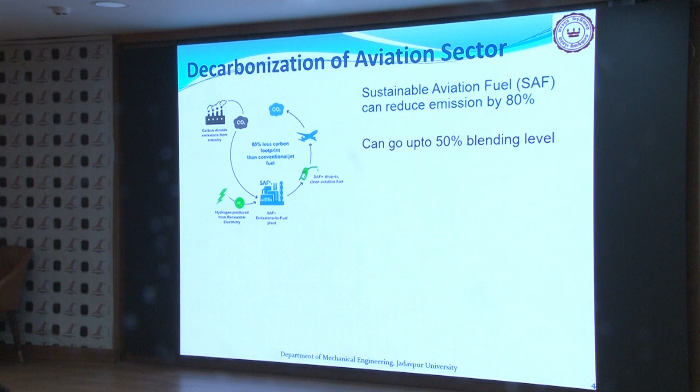with synthetic fuels. But there is good news: in 2021, United Airlines had one experiment, and they demonstrated that 100% SAF could be used in the engine. But okay, let us see how long it takes to go for that for commercial purposes. Actually, the problem now is cost.

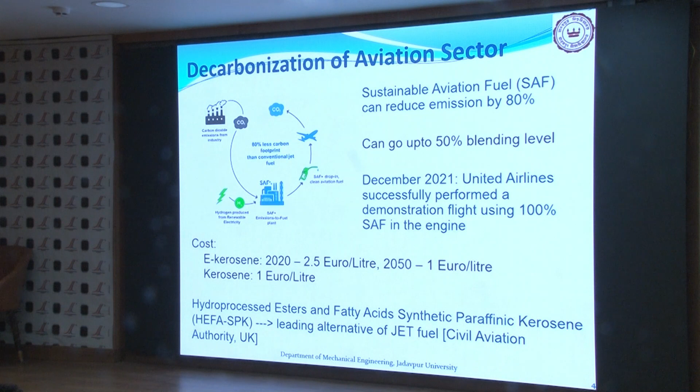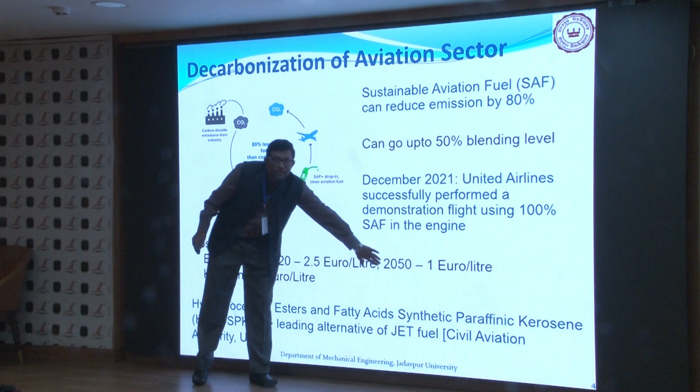As Dr. Sharma pointed out in the very first plenary lecture, the cost at present is somewhere here. It is 2.5 euro per liter, whereas our regular kerosene we can find at, say, of the order of 1 euro per liter. But the situation is good in future; in 2050 the cost will come down. So we can go ahead in that direction.

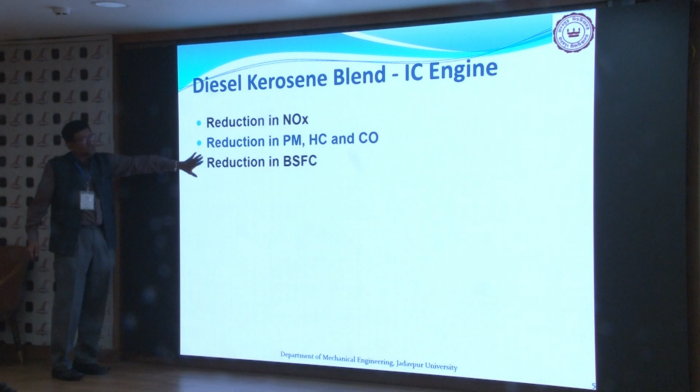Now we can use diesel-kerosene blends in IC engines also. The main reasons are basically these two: we are reducing the emission, but we are compromising some amount of BSFC. So the finding is, if you blend up to say 7 to 14% kerosene, there is no significant loss of BSFC.

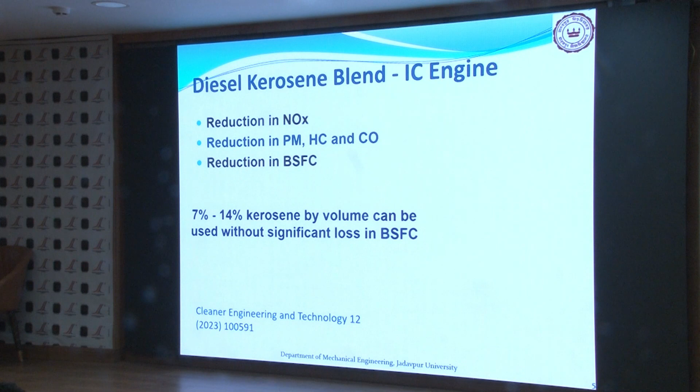So as these three are pretty similar, we can think about the spray characteristics of e-kerosene in light of our earlier kerosene research. So the question is, are their sprays similar? If these three things are similar, we can start with at least a preliminary idea that our spray characteristics will be pretty similar. Maybe not exactly, but almost similar.

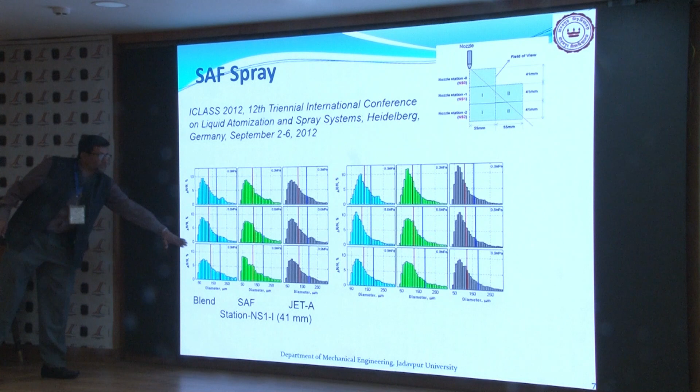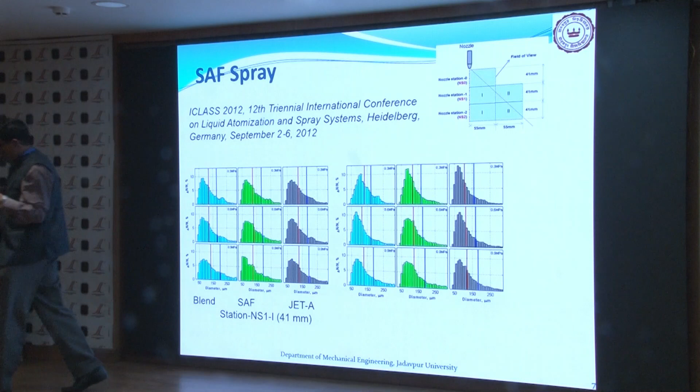So there was one experiment with a nozzle. If you look at the spray characteristics of three fuels, one is SAF, one is pure jet fuel, and one is the blend, it is very hard to differentiate between them because they are pretty similar. And the mean and Sauter mean values are also similar. These are at three different pressures and at two different locations. So we can say that, covering the whole spray angle, we are getting pretty similar features.

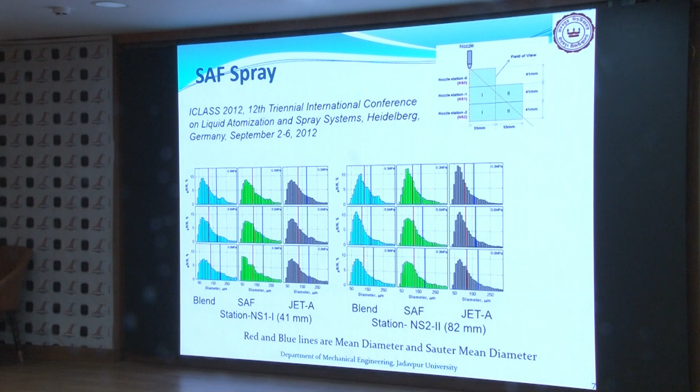So these are the extract from the earlier thing, so there is no need to explain it more.

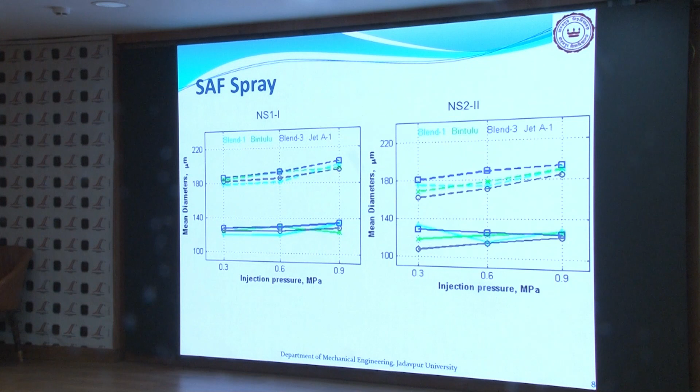So now let us come to our atomizer, what we started with GTRE. So it was a hybrid atomizer. Hybrid means it is a mixture of pressure swirl and air blast kind of a thing. So the design is a bit complicated. There are actually three lines. There is one central air line, one annular fuel line, and one annular air line.

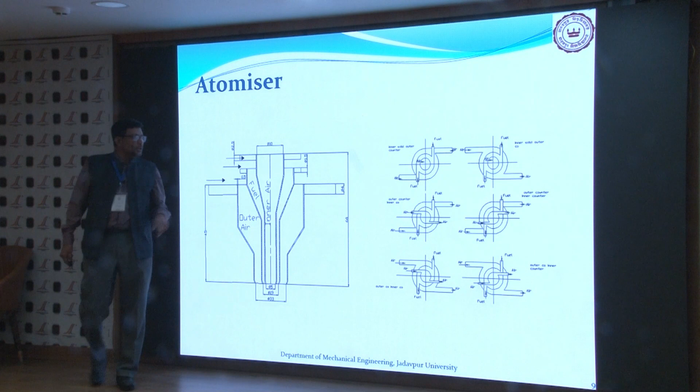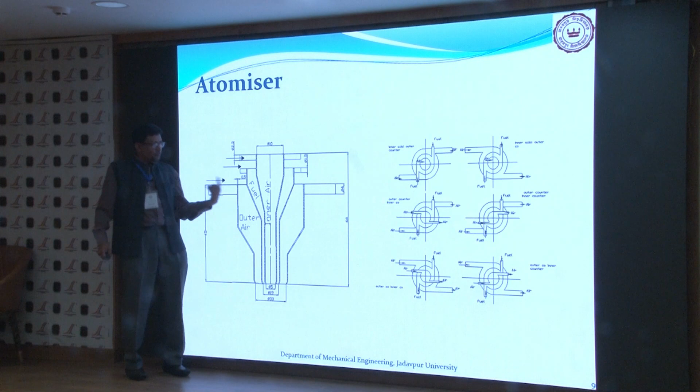And if you look at the situation, you can change the direction of flow. So for the central line, you can go for a straight flow, you can go for a swirl. For outer, you can go for a swirl, and for fuel also, you can go for a swirl. So there are many combinations we can have.

So what we saw there, the breakup types are not very simple. Like this is one, this is another. So depending on the flow regime, depending on the flow directions, we can have different types of breakups which we are experiencing with our standard kerosene. And obviously, as our property values are pretty similar, we can have a similar kind of a breakup pattern for the synthetic fuel also.

So we have experienced these 6 kinds of situations for different flow rates and different flow orientations. So if I show you, this is for 1 LPM kerosene with co-flow of outer air and inner co-swirl. Inner co-swirl means the inner air and fuel are swirling in the same direction, and outer air is also swirling in the same direction as fuel. So you are getting this kind of a thing.

So in a particular orientation also, as you are changing your velocity, you are getting different breakup regimes. A similar thing you will get if you go for inner counter swirl. So fuel is moving in one direction, your inner air is moving in another direction, and outer is moving in another direction.

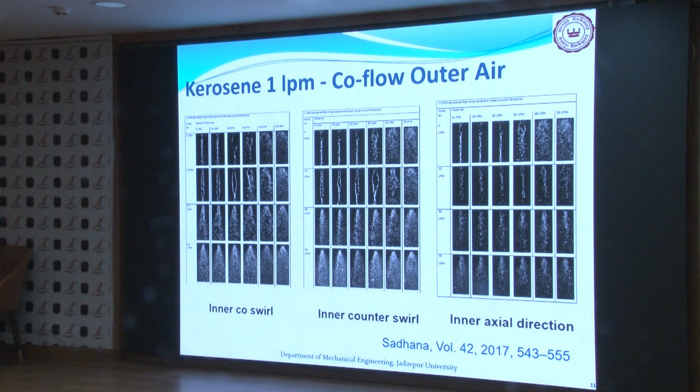So what we did, we tried to plot this breakup regime for different conditions. We thought that firstly this is required, for what case we are getting what kind of a breakup, and then we can go for the measurement of different breakup parameters.

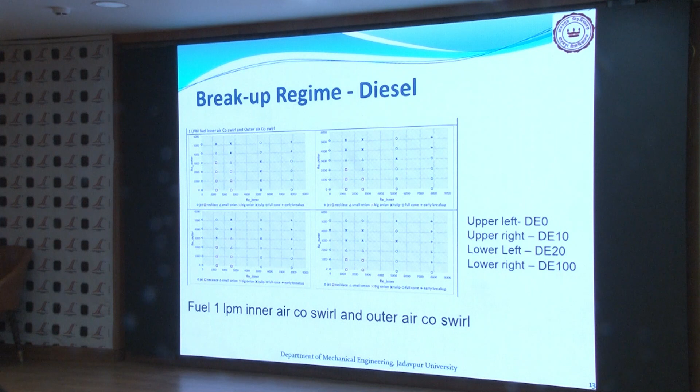So this one is for kerosene. And if you look at the thing, you can see that this is actually not for pure kerosene. We go for some kerosene and methanol blend also. So we did the same thing for diesel, and also with diesel alcohol blend. I am not going into the detailed data for this, because you can find those in the publications.

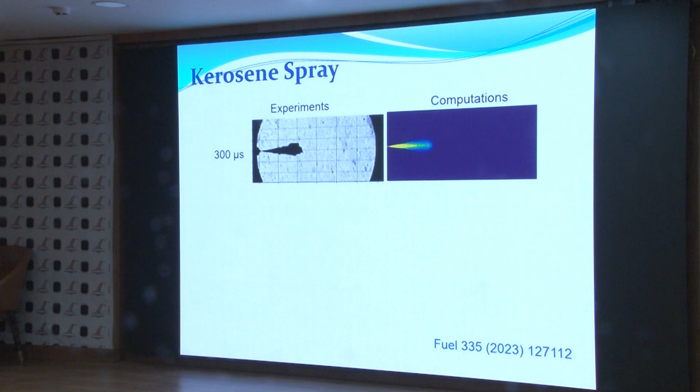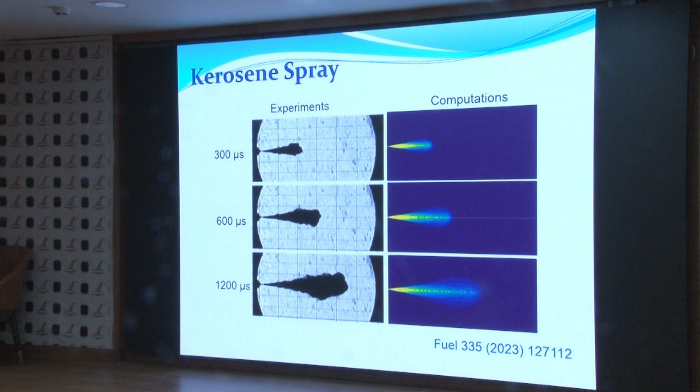Now what we got recently, that is one paper which came in Fuel this year. So one experimental study, and we tried to model it. So with their experiment and our modeling, we tried to map this. This is at different time instances, and if we go for diesel and kerosene blending, where kerosene is 50% and diesel is 50%, then we can find this kind of a situation.

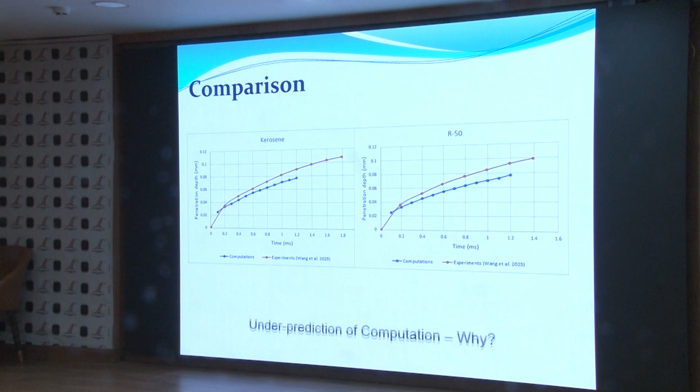So if I quantify the thing, here one mistake is there, this will be in meter, not in millimeter. So you can see that our computation is under predicted in both the cases, in case of kerosene and in case of the blend. Now why is this under prediction?

So basically we have taken this DPM model, that is discrete phase modeling. What it does, it takes a monodisperse spray of the Sauter mean diameter. So when you are taking a Sauter mean diameter monodisperse spray, you are actually neglecting the smaller diameters and the higher diameters in your spray regime. As the smaller diameters are thrown to a longer distance, you are not able to capture that in your modeling.

So our modeling is actually under predicting, but we can rectify this, because we know what is the reason. Now if I go from monodispersity to polydispersity, and if I take a particular distribution function, I can take the effect of the smaller droplets and their throw, and I can fine tune my distribution for this kind of experimental thing.

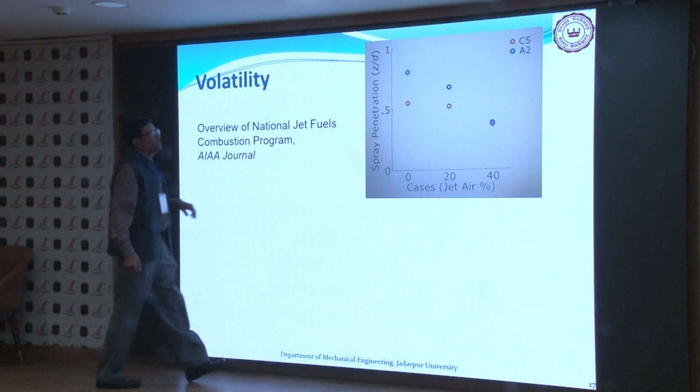But life is not so simple, because we will have to take care of the volatility. And here lies a problem. If you look at this thing, the blue are for A2, A2 means your conventional fuel, and C5 is your SAF. So you can see that for C5, the penetration is less. When you are measuring the droplet penetration, the experiment is showing that your penetration is less.

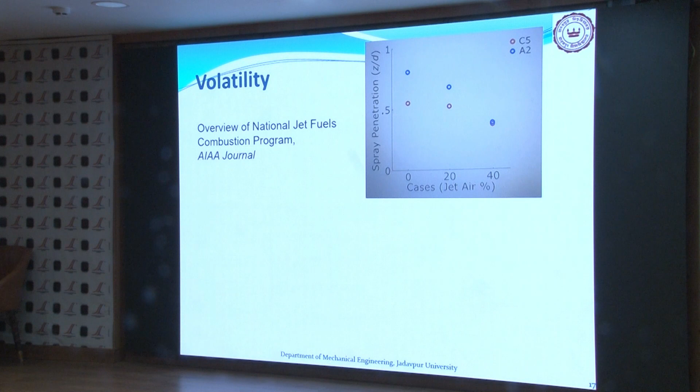What is the problem? If you look at the volatility curve, you will see that the volatility of this is higher. So when you are seeing the spray in a liquid domain, in a droplet form, actually before that some amount of fuel is vaporized.

So if I try to model my thing properly, then I need to take care of the volatility along with my distribution function of polydispersity. That is not really a very easy task for the modeling persons. But we are on it - or rather, our young researchers will be on it. They will take care of that, and they can do it, that is my belief.

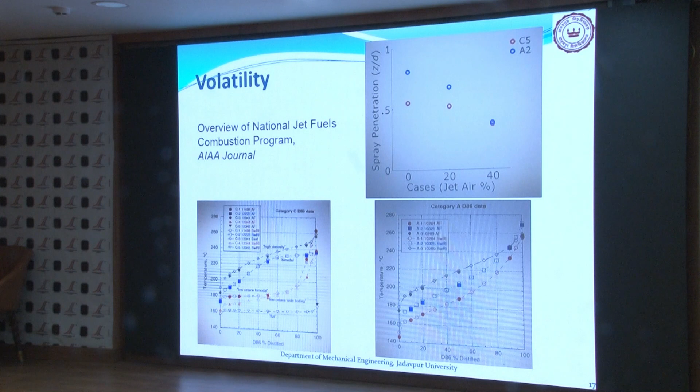So for summarizing, I need not to tell much. One thing is e-kerosene is sustainable and scalable, there is no doubt of it. But experimental data generation is required because we will need to go for a proper CFD model. And if you need to go for a CFD model, you need a good amount of experimental data so that you can match it. So, model generation of breakup is required. Thank you.

And just in time, congratulations. Maybe there are questions? Yes, Chetan. So you also tried modeling for reactive condition?

No, not yet. The modeling I showed you is non-reactive. If you talk about this part, you are not really taking care of the reaction because we are not going into combustion. Also, we have not taken care of the volatility, the evaporation of the fuel. But when you are doing the experiment, evaporation is there. That's why I'm saying here we have not yet taken care of the volatility, because when there is an incident of combustion, it will not be easier - it's a very complex kind of modeling. But okay, we'll have to do it.

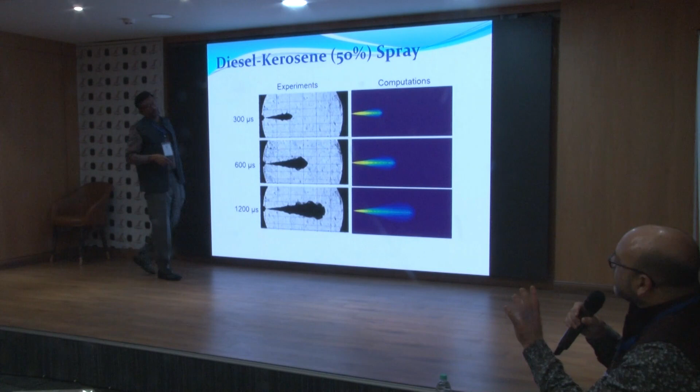But in this paper we have the data with evaporation. So now we'll have to try for that. And is the air around the droplet steady? Yeah, it is steady. How do you get the information of this velocity? From the pressure difference - we calculated the velocity at the nozzle mouth using Bernoulli's equation. Or, if you give the nozzle geometry, then also you can have a better velocity distribution. Thank you very much.

Long live India and France friendship.